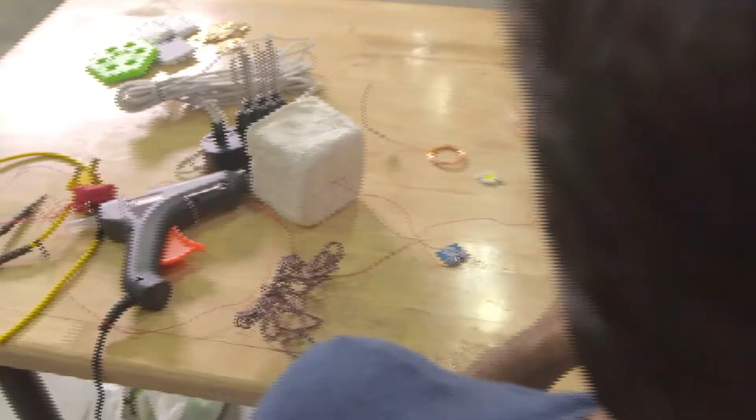Hi, I'm Karthic Rathinam. I'm from DSK International. I'm studying first year, I'm 17 years old, and I'm from Chennai. I have an interest in creating new things.

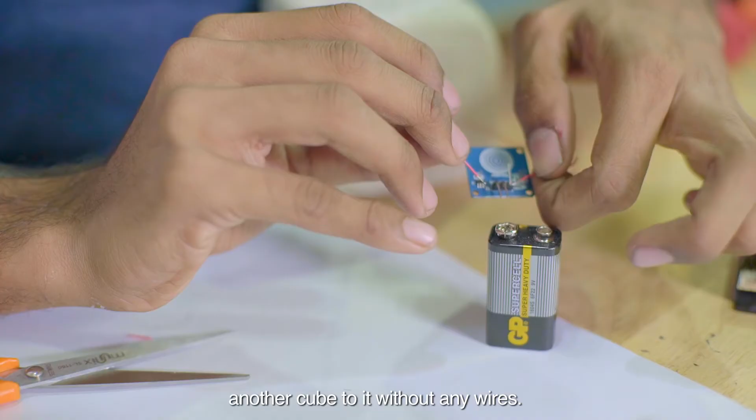My first initial design was to make something which can involve magic and modularity in it - a cube which lights up whenever you connect another cube with it, without any wires. Fluid blocks got inspiration from bricks, like the building sites around my home. As all the buildings were developing, I had to look upon bricks a lot and study how they arrange together. All the magnets are placed outside on all 6 sides of the cube so that when you get one more cube and attach it, it works.

It was a massive competition around India and it was pretty huge for me at that time because I was still finishing school and just getting into the design world, and I got a call from the biggest design company. So I had a Skype call with my mentor Alex. It was a great opportunity.

The thing was, it was a modular block - so it is actually a table element. If you want a light, you can have a light. If you want a fan, you can attach a fan. If you want a speaker, you can attach a speaker. It depends on what you think.

If magnets had this problem of repulsion, I thought of one more thing - it's a socket kind, some kind of physical interface, male-female type. If you take a single block, only the base will have south. It'll be like a Lego block kind, where the base has a different pole than all the other sides. So if you have north around all of the sides, and south on the base, you can attach it.

The other question I had was about wiring in parallel versus series. I had a doubt because if you're connecting in series, the first light will be brightest and the last will be dimmer, or in an LED it won't even work - you need some forward voltage to turn on. So if it's in parallel, it'll be the same brightness.

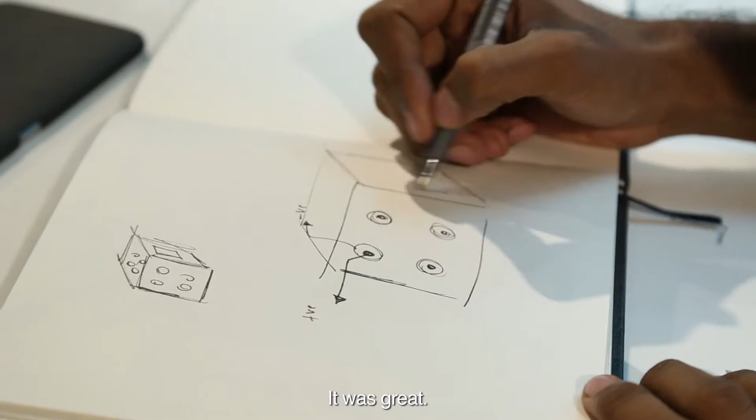I've encouraged him to just start someplace, right? And I'll feel more comfortable guiding him along as an editor, making suggestions based on what he's trying to do, as opposed to arbitrarily dictating things like doing this in carbon fiber. Then I and other mentors at Godrej can look at how he can leverage some of our knowledge to achieve what he's trying to do - that'll be really great.

So Alex helped me out with how the magnets can be attached together and how the circuiting can be improved, and how the form - the basic shape - he gave me a new perspective and new idea on how it can be developed.

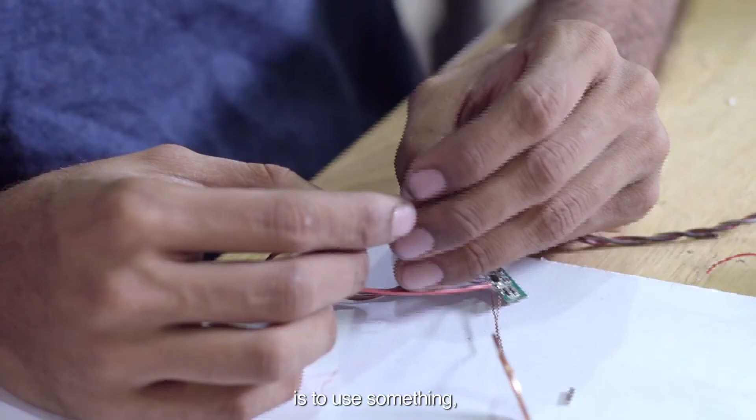I had a couple of talks in the last meeting with Alex and we were discussing how AC can be harmful and dangerous. So we were thinking what other solution we could go with, until I find a DC source of light which is pretty bright and could be incorporated in my product. So the next best possible solution is to use something which can trigger the current passing through - I'm using a capacitive switch sensor. It works for now, it works in DC - I tested it with a 9-volt battery. Now I should try it out with AC current and see how it comes out. If it works, I think I'll go on with this design.

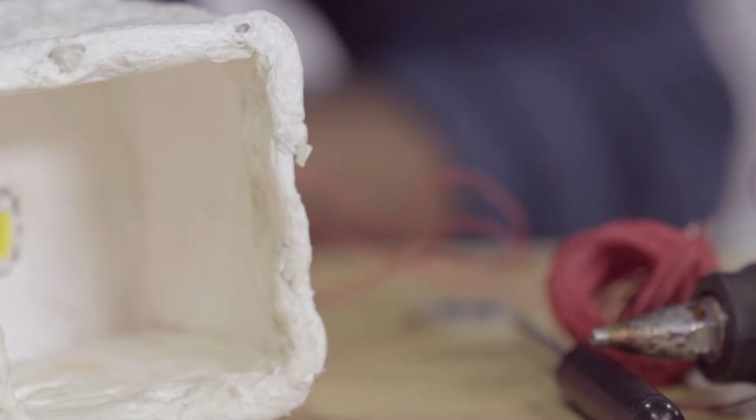We had this lecture in college, and the final slide said 'be outside, think inside.' This actually made me think that I could use these magnets instead of keeping them outside - I could keep them inside. Magnets attract the same way, whether they're outside or inside, it's the same principle.

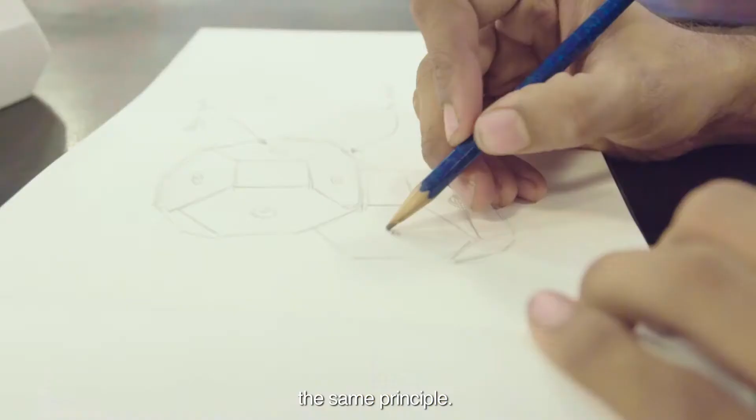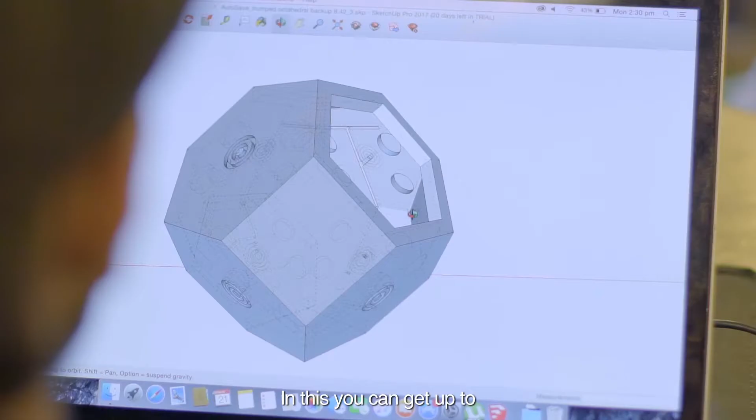When I did this simple cube-like structure, I 3D printed it. It opened up a lot of possibilities of what I can do - I can make a different structure which looks even more elegant and beautiful, and gives a more natural feel. So I got this structure called a truncated octahedron structure - it's 8 hexagons and 6 squares joined together to make this structure. With this you can get up to 7 different possibilities for connecting. I 3D printed a contact cavity through which I can fit my contact points easily.

I got a 10 mm magnet and my hole was 15 mm, so I had to fill in a 2.5 mm radius. If it is not filled up, the magnets will rattle and shake, and whenever you rotate it, the magnets might pop out. So there was this elastic string lying around. I got that string, a small part of it, tried putting it around, and it worked perfectly. It was perfectly 2.5 mm in diameter.

I'm using a small thumbtack because anything else would create a bigger hole. These act as the contact points for my product. So when you take two contact points like this one, join with another contact point, the current passes through them.

So I just completed my model. It looks pretty good and it works pretty good. The only thing left is to get the adapter and put it in my base. It's a 12-volt adapter, so the base is practically a hexagon, the same hexagon toppled over and kept. I just need to assemble that, and then my model works pretty good. I'm pretty optimistic about the February exhibition.

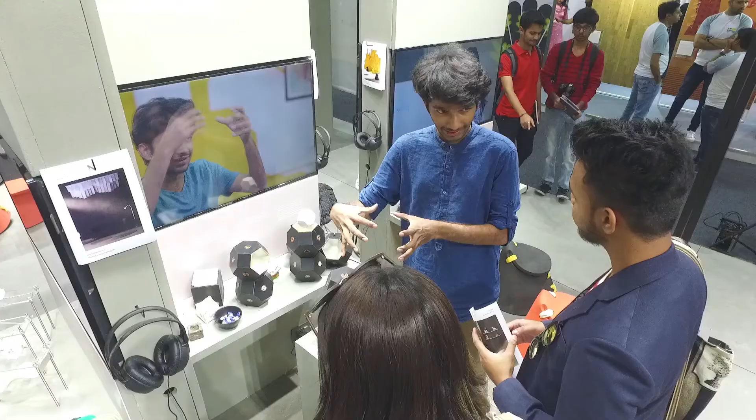So finally we're here, and my product is here. This time last month, I didn't think it was going to work out completely because it was not completely aligning. Now I've fixed a few little mistakes, and now it's working, and people are using it. It feels great.

There were times in the process I was very hard on him, but I think, like any good design student, he understood that it wasn't personal. Anytime we challenged him to take things up another level, he did that.

It's lovely talking with Karthic and his lighting blocks. He's the youngest contestant here, right? We've got a lot of people with a bunch of experience working in the real world and making these things happen. I love the youthful enthusiasm that he brought to this. Even now when I spoke to him this morning, he was just smiling the whole time because he's super happy to see this thing come to life. And it's very cool — it works. It's a light, not a very complicated idea. He's not trying to solve the biggest problems in the world, which is actually great.

And he's done it. So when people came to me, they went to the other designs, looked around, and then came to me. They were like, are you an architect? What firm do you want? How old are you? Everything. And I told them I'm a first year student, I'm 17 years old. And they were like, what?